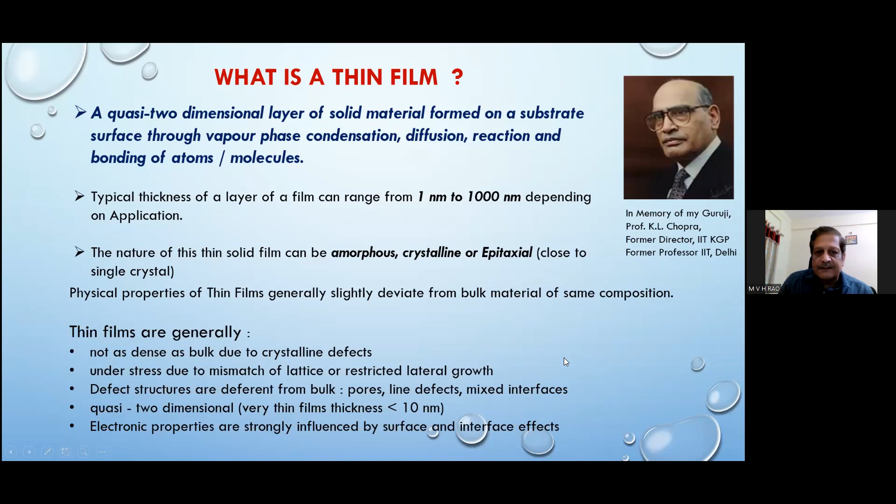Also, the electronic properties strongly depend on the surface and interface effects. One more advantage of a thin film is, right now I discussed a single material, but it need not be a single material. We can always engineer the materials, engineer a thin film structure. You can design a multi-layer combination of different materials in different ways and study the properties, which will be totally different from the individual materials which we are depositing.

So thin film process gives a lot of flexibility in innovatively designing and developing a variety of materials which are otherwise not possible. Now I'll come back to the importance of thin film technology. It is an enabling technology. The present day micro engineering happening in MEMS, or present day nanotechnology, wherever materials are deposited in the form of a film, all this requires it. And it's not just making a film - ultimately you have to study the properties and use it for a device.

It may be a thin film solar cell, a sensor, a gas sensor, or some other electronic device, maybe a laser diode, whatever it is. So ultimately the thin film process is an enabling technology which will realize the photonic device or electronic device. So it is very important - it imparts functionality to this.

Suppose we are just depositing a single layer of some material on a surface. Certain surfaces are corrosive, and you want to stop the corrosion. One of the ways is to put a protective layer on top that will stop the corrosion. Similarly, by depositing hard coatings like titanium nitride, we can protect the sharp cutting edges of tools and reduce the wear and tear of cutting tools using certain hard coating materials.

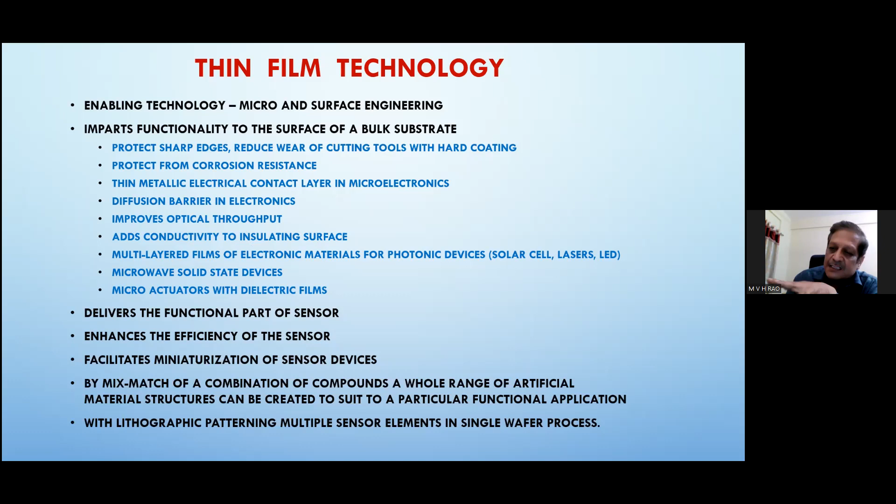Ultimately, after some time, there will be electric discharge. But if there is a conducting layer, it will disperse the charge uniformly over the surface, and that way we can avoid electrostatic discharge. In fact, ITO is applicable to screens also, all the video screens are coated with ITO, and I think most mobile screens are also coated because it is conductive as well as transparent.

There are also other multi-layered electronic materials that can be deposited to generate the latest photonic devices like solar cells, lasers, and LEDs, and even microwave solid-state devices. Thin film technology is used for all the electrical contacts, and also certain dielectric materials are used as microwave devices and micro actuators.

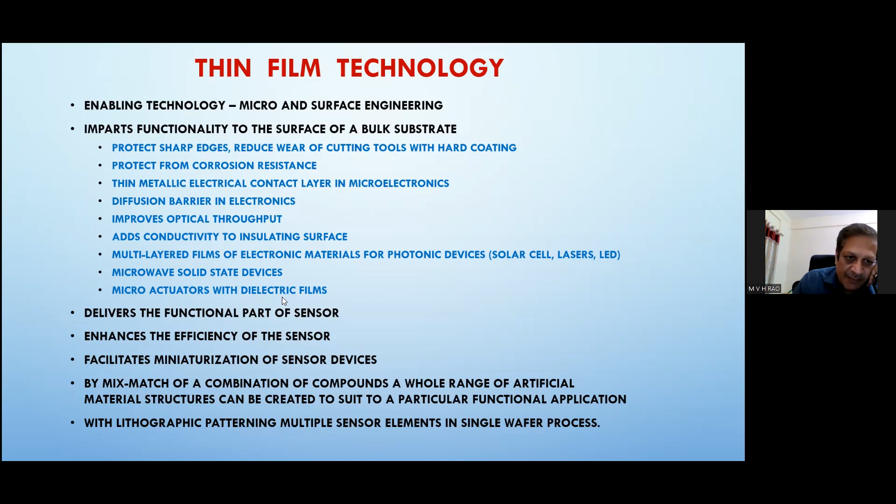Actuator means you apply a certain voltage and it moves - by applying voltage there is movement because of stress variations, and that is why actuation happens. In such applications, using dielectric thin films, microactuators are also there to distort a surface or to correct a surface. That is also one of the applications.

Overall, thin film technology helps by adding a functional part to a sensor - it improves the efficiency of a sensor. It facilitates miniaturization. The whole sensor can be miniaturized to very small sizes, and then multiple sensors can be made on a wafer.

As I told you previously, once you have a thin film material coating system, it is only our imagination what type of film you want to make. We generally follow what is already published and try to repeat or modify those things. But in principle, any combination of metals, insulators, and dielectrics can be used - you can design and make a multi-layer film combination and study the properties, which will have some exciting applications.

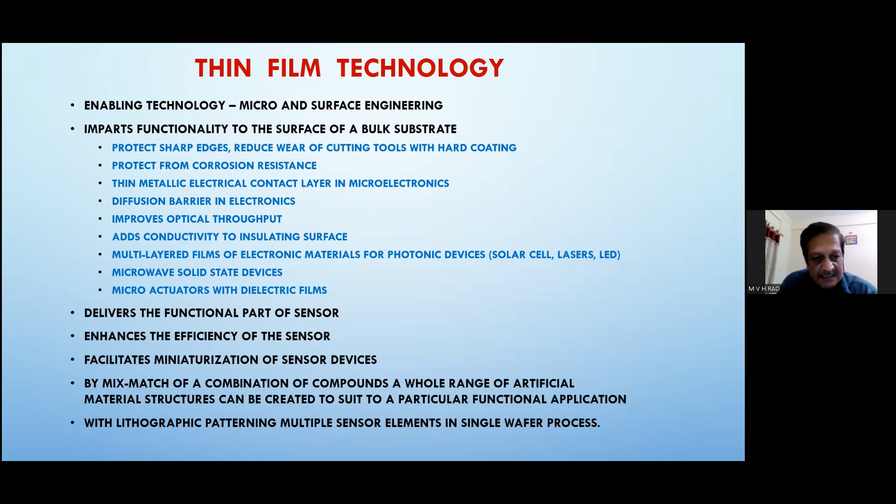So that is it. Now let me move to the next slide - what are the different ways we deposit a thin film?

There are two main categories: one is physical vapor deposition, PVD techniques, and another is chemical vapor deposition. Then there are thin films from a solution, and sol gel, which is also a solution - a semi-solid solution, a gel - and through that process also thin films can be made.

In the case of sol gel, though it is not exactly vapor condensation, the particles are all colloidal - already formed in the sol gel as a colloidal form, with micro and nano particles. They are deposited, and then after annealing, the particles combine together to form the film. Okay, let me come to the first part.

Physical vapor deposition means, as I told earlier, you have to vaporize the material we want to deposit by heating it, either by thermal means or using a high energy electron gun. High melting point materials have to be vaporized with an electron gun, focusing high energy electrons onto the material, heating it until it gets vaporized, and then that vapor gets deposited everywhere.

There are other ways of generating vapor. The method differs in the ways and means of generating vapor, which can get deposited on a substrate, and also in how you impart certain energy to the vapor by ionizing it, using a plasma, or by many other methods. So let us see how to create an ionized plasma vapor of the material. Plasma will help in ionization, which helps in better adhesion and overall film growth.

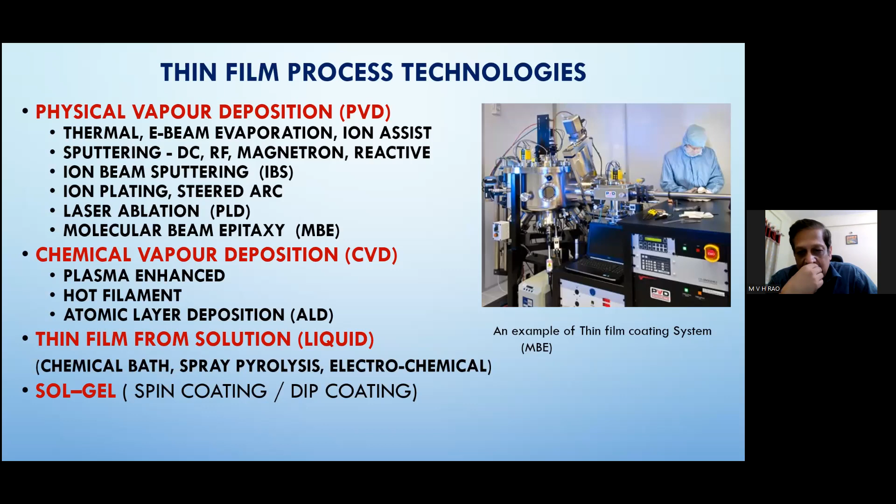Electrochemical deposition is also another standard known method, like gold plating and all - we can plate gold, nickel plating, gold plating. These are all techniques that are used, but there also by appropriate control of the processing, a variety of devices can be made and done.

Okay, I think I have to go a little fast. I'm trying to explain too much.

Anyway, in my presentation I'm not going to go into any of these, only optical things I will be focusing on. So this I can skip.

Vacuum is essential for all PVD coatings, because by generating high vacuum conditions, vapor pressure gets reduced, so you can vaporize the material at a lower temperature. And we have to eliminate atmospheric contaminants.

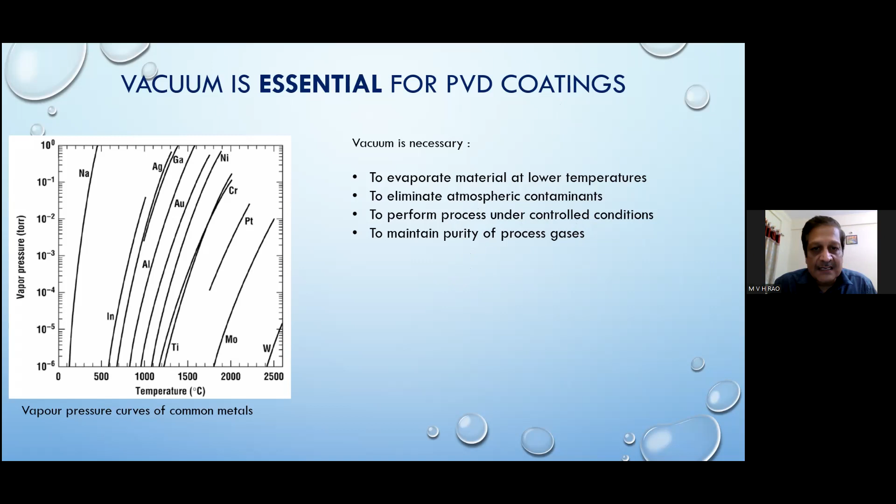So how to generate vacuum? Vacuum technology itself is a big subject. Maybe some other time somebody will explain what vacuum technology is, vacuum chambers, how to generate vacuum, different methods, and how to control it. So I'm giving just a few examples here.

When we evacuate a chamber by pumping out the air inside, this rotary vacuum can bring it down to 10 to the power of -3 millibar, meaning one millionth of atmosphere. But to do the actual vacuum processing, we need to go to 10 to the power of -6 millibar - that is the type of vacuum required. To achieve that, there are different methods.

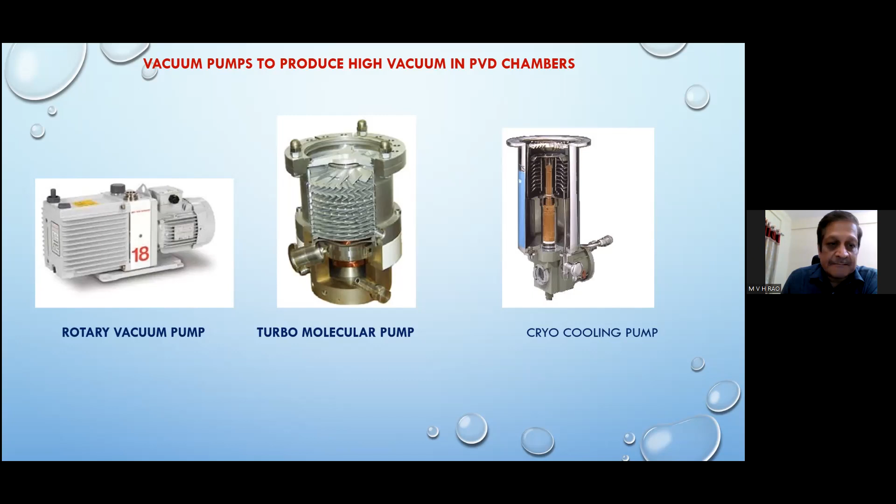So for this reason, normally in any vacuum chamber, the pumping is first done with a roots rotary pump to get a -3 vacuum. Then we switch over to high vacuum, from -3 to -6, using turbo pumps, cryo pumps, and many other varieties. This is a brief introduction about vacuum pumping. Of course, there are also gauges and valves. Vacuum technology is a subject you should know later, so I'll quickly skip it since we have already discussed it.

Basically, there are three types of film growth. When the atoms come and sit on a substrate, there is island growth, meaning small islands are formed, and slowly these islands grow bigger and coalesce together to form a film. That is one way. Another is layer by layer growth.

This layer by layer growth is called the Frank van der Merwe method of procedure, as in ALD and MBE techniques. First one layer forms, and only after that layer is fully complete does the next layer start forming.

In other cases, it's a combination: the first layer will form, and after a few layers, islands will start forming again. This is a combination of layer plus island growth, called Stranski-Krastanov type of growth. These are the three typical thin film growth modes, describing how atoms come together and coalesce to form a film.

Depending on our type of application, we need to worry about what growth conditions are required to achieve the desired result, and what process parameters we have to control. So that is what is important here.

So first, atoms will condense, then adsorb, and then run around on the substrate. If the substrate is imparting some heat energy, they will have freedom to move around. Normally, if there are certain defects, the atoms get stuck at those defects.

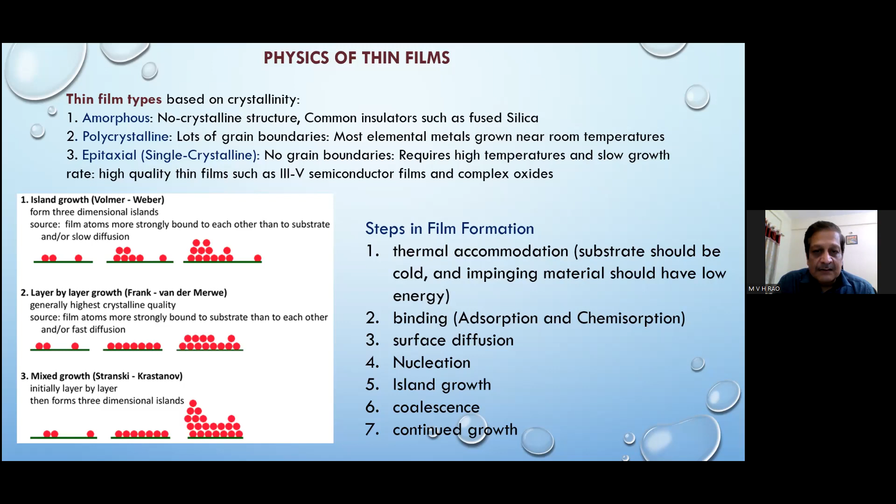So, atomic layer engineering: when these atoms come together, first one, two, three, four atoms, as they combine there is a combination of free energy, some thermodynamics, involving the surface energy of the nucleus and the volume energy.

Only when the volume energy is more than the surface energy will it become a stable entity. Otherwise, there is a critical radius for this nucleus, and until that radius is formed, it will not be stable.

This means if 4-5 atoms come together and the surface energy is more, they will break up again and return to being individual atoms. But if the volume energy is sufficient, say 10 atoms come together in one shot, then the overall volume energy is better, and it will be a stable material.

If we deposit very fast at low temperatures, we'll end up with a very columnar, loose type of grain growth, which will not be stable and will not adhere properly. Ultimately, whenever we are depositing a film, what we want is strong adhesion.

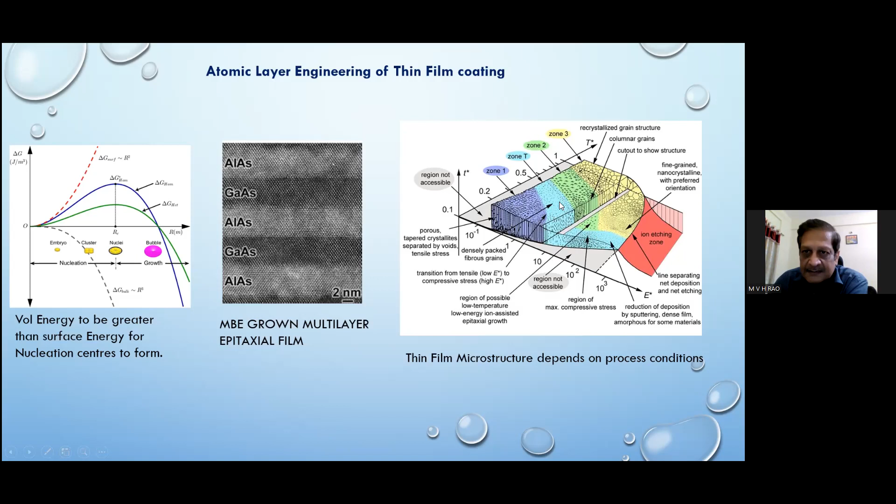It may be a single crystal, suppose we want. In that case, we need to use low deposition rates and appropriate high substrate temperatures, so that appropriate energy is imparted to the atoms to move around. If the temperature is too high, that's also a problem, then it will re-vaporize. So this diagram tells us what are the typical conditions required to obtain either a crystalline film, amorphous film, or an intermediate microcrystalline film. You can study this later when you take thin films as a subject.

Okay, there are different methods. We had already discussed most of these things: thermal evaporation and sputtering techniques.

In the case of thermal evaporation, as I mentioned, here I'm showing an electron beam. It comes bending in the form of an arc, achieved by using a magnetic field. There will be a high power magnet, and we know that charged particles bend when there is a magnetic field. So using that field, the charged electrons that are thermionically generated by heating a tungsten filament are accelerated using high voltage. Those high voltage accelerated electrons bend through the magnetic field in the form of an arc, and they get focused onto the material we want to deposit, in a crucible. In that crucible, a high melting point material is put, and when this high energy beam is focused on it, energy is imparted and it will melt and then vaporize further, and the vapor atoms come up to the top.

This is a general typical substrate arrangement, called planetary motion. There is one big holder which will be rotating, and to that, smaller holders are put, which will also be rotating in the opposite direction. This is all required to ensure uniformity of the film on the substrate. Otherwise, a simple one stable substrate also will do the job.

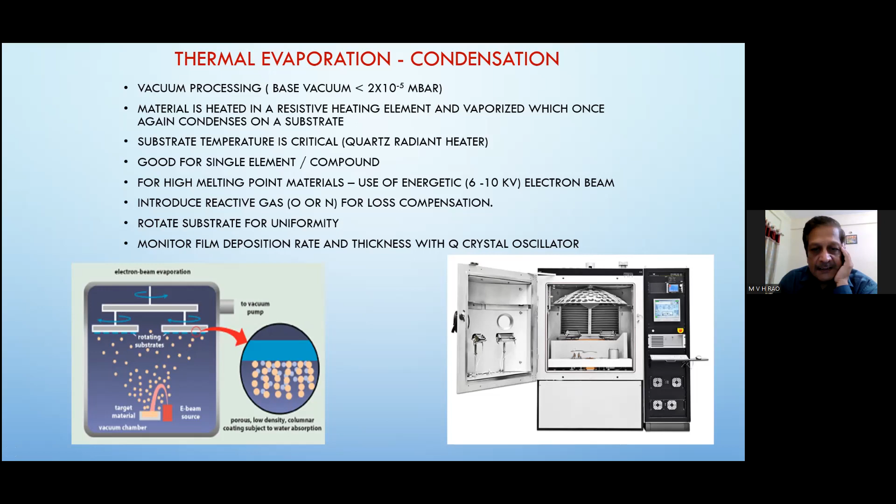Here I am showing certain sources. For thermal evaporation, we use molybdenum evaporation boats. On the other side, I'm showing this electron beam deposition system. Here we see the beam hearth, where the material is put. Then you can see the power supply, where high voltage is coming through these two leads. There is a tungsten filament here, which is heated, as well as the electrons are accelerated. There is also a hidden magnetic field, which is not shown here, it is covered. That magnetic field bends the beam and heats the material.

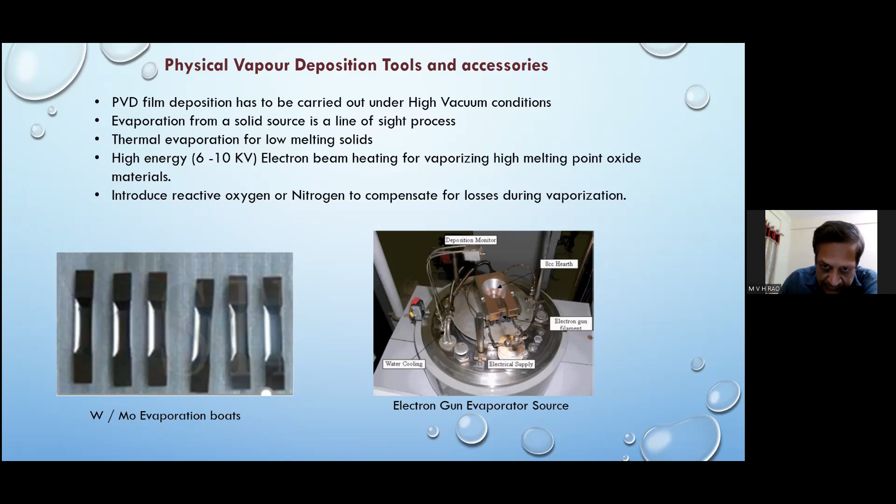Now, this is also ion assist deposition. I'll quickly go through it. It's basically the same as electron beam deposition. The only thing is, to improve the process, we can impart extra energy by putting an ion source. The purpose of the ion assist gun is, as shown in the earlier growth modes, suppose island growth is happening. If there is no ion gun, it will simply grow as island growth, and have a very rough surface, with a lot of porosity. It will not be good.

So to convert the island growth process into a layer process, what we can do is use the ion source to give some extra energy. The growth islands are intentionally broken away, so that the atoms vaporize again and rearrange themselves properly to form a layer.

So the ion assist gun basically re-etches the growing film. It is etched partially by this ion gun so that all the high point islands are removed and it becomes smooth. Then the atoms are once again rearranged, given certain energy to rearrange themselves, so that the film grows in a much smoother way.

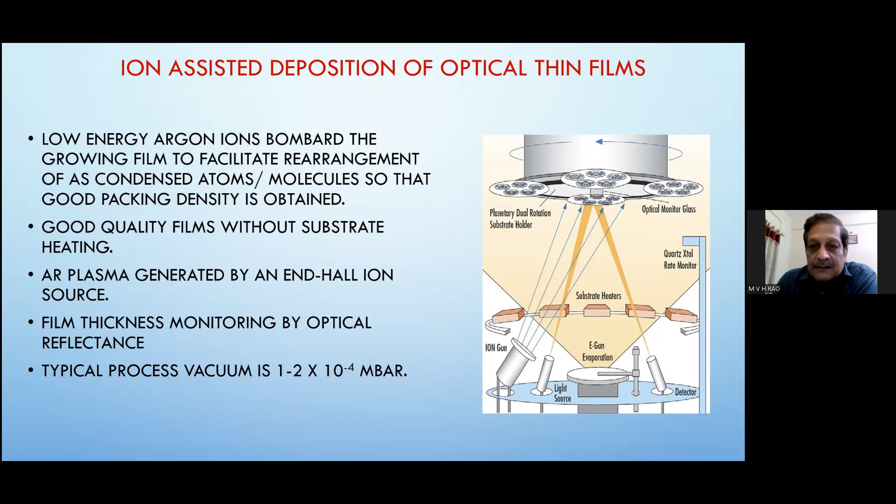And sputter deposition, I already told how it happens. There is magnetron sputtering here, where magnets help the ionization of both the target atoms and the argon ions to improve the sputtering yield. For that reason, magnetrons are put in place.

Typically the distance between the substrate and the sputtering target, in the case of sputtering systems, is maximum about 50 millimeters, 5 to 10 centimeters. That is the maximum gap, because sputtering happens very slowly with a very low yield, so we cannot keep the substrate too far away.

Whereas in the case of electron beam gun and ion assist, the distance is almost more than 30, 40 centimeters, sometimes 50 centimeters also. The distance between the source and the substrate is much higher.

But those are all line of sight, because the atom released by the source has to travel in straight lines unless it is knocked by some other vacuum molecule or atmospheric molecule. Otherwise, it will move straight up and get deposited, hitting the substrate. That's just what is called line of sight.

Okay, you tell me whenever the time is there. I'm just okay.

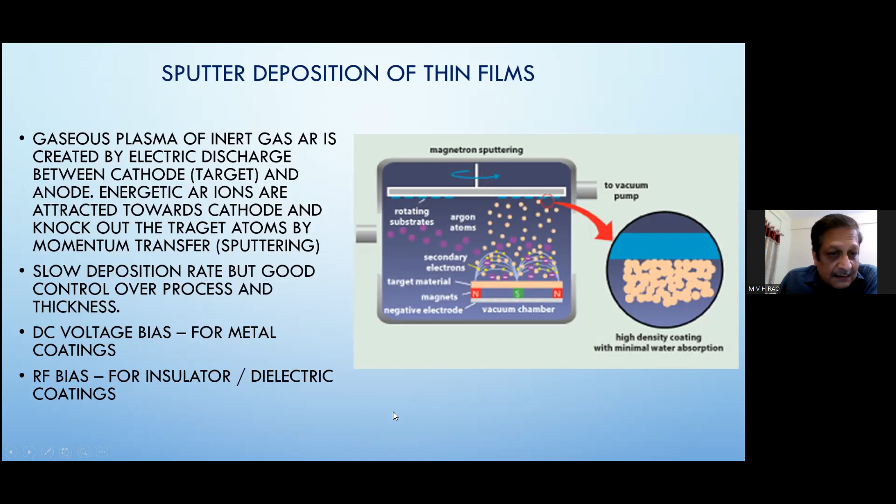So these are the different methods. I just want to quickly go through them. I already told about pulse laser deposition.

The laser plume is generated by a laser beam, and it vaporizes locally, maybe within a few millimeters, 2mm or 3mm or maximum 5mm area attacked by the laser, whatever is the spot size. From that area only, material is evaporated and it comes in the form of a plume and gets deposited.

For that reason, you need to continuously keep rotating or moving the target, so that every time some fresh surface comes into picture. Otherwise, it will simply drill a hole. I already talked about how plasma can improve the coating, how it can impart energy to the atoms so that they can form a better film.

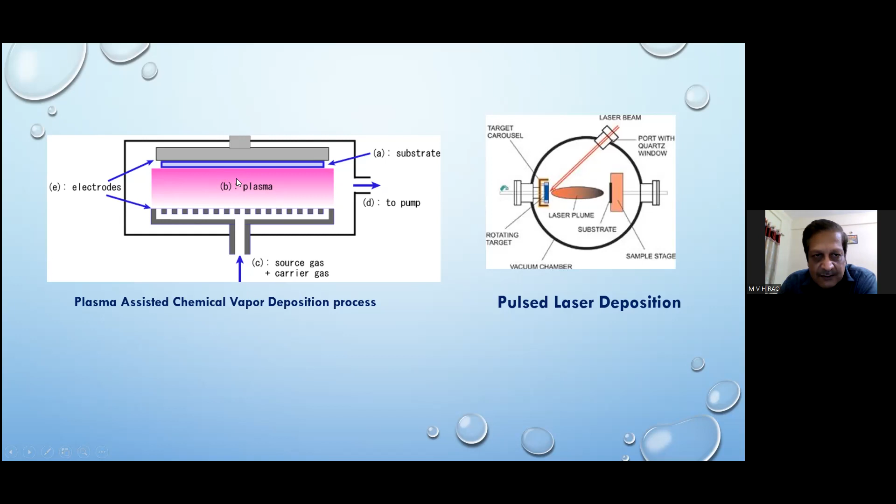In the case of ion beam sputtering, this also I already explained. There is a target and an ion source, particularly mostly argon is used. High energy argons are ionized inside a chamber. Plasma is created inside the ion source and then accelerated through a grid, coming out with about 500 to 1000 electron volts energy. Those energetic argon ions hit the target and knock off the atoms.

These atoms come out in the form of molecules and atoms, as vapor, and get deposited. In this case, this itself gives a very good film as it is, as good as ion assist. But to further improve the process, sometimes another ion source is used to assist, to get very smooth films with very low micro roughness, so that the interface is very well defined.

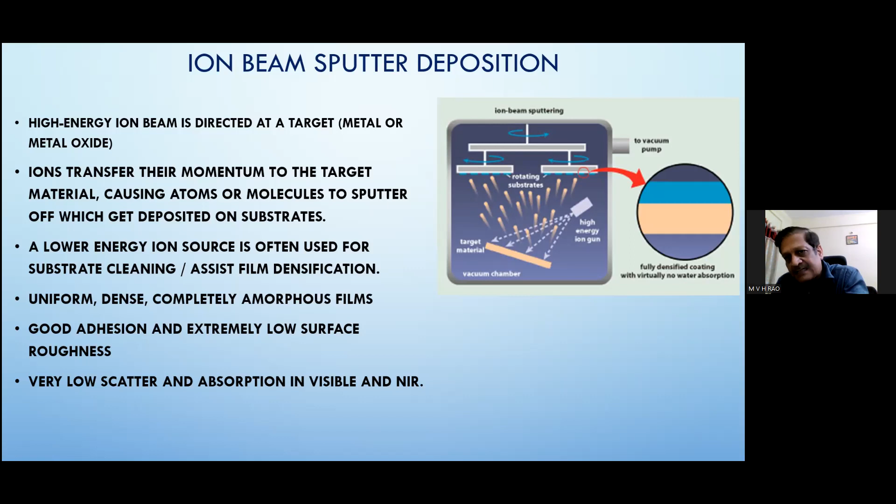But generally, only in special applications do you require one more assist gun. Then two ion sources will be there, one for etching the target and removing the material, and one for this assist purpose.

Now I come to the general thin film, to the optical coatings. The process methods are the same, for good adhesion to the substrate. These are all the requirements: it should be abrasion resistant, producible with reproducible film properties, and environmentally stable. All these things are required for any multi-layer, since optical coatings are multi-layer films.

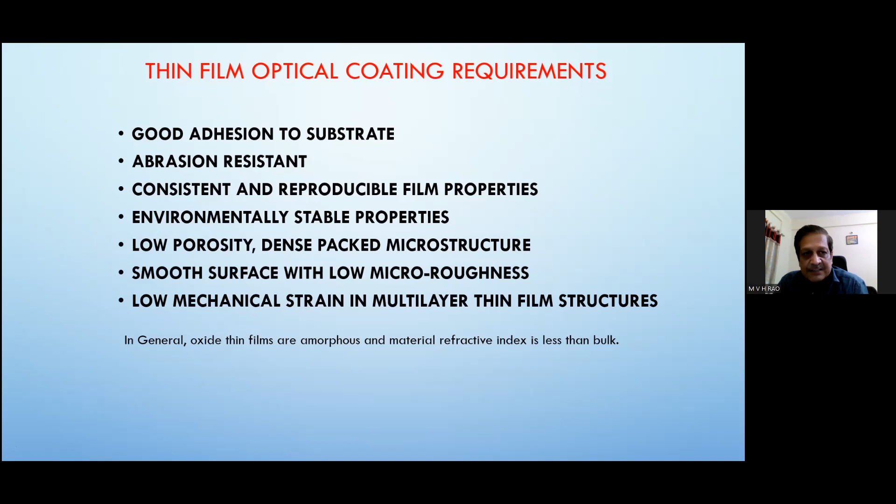This is something I already mentioned, so I'll quickly go through it. Surface cleanliness is very important. Lattice matching is important if you want single crystals. Substrate temperature is also a very important parameter for good adhesion and good microstructure. The deposition rate means how many atoms are arriving and getting deposited on the substrate.

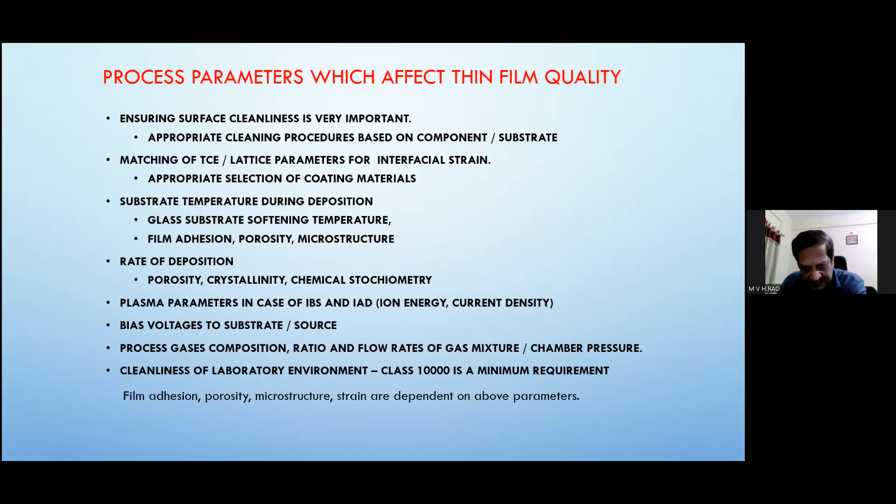If it is a very fast deposition, it will be highly porous. Chemical stoichiometry, we already mentioned all that. In the case of ion beam assistance, ion assist, the ion beam parameters dictate how the film is grown. So these are the various aspects, and all of them are already covered.

I already mentioned substrate cleanliness is very important. That is normally done by etching and cleaning with soap solution, and then chemically etching if required to have a good surface preparation. Sometimes in situ is possible. In situ means after loading the substrate inside the chamber and getting the vacuum, you create a glow discharge plasma. These argon ions hit the surface, but without coating, it will simply knock the surface uniformly, so that any contamination on the surface is removed.

This is something similar to the assist gun, the ion assist, ion source. The same thing without depositing the film - if you are simply doing ion assist, simply cleaning the substrate - that is one way of preparing the substrate ready for coating.

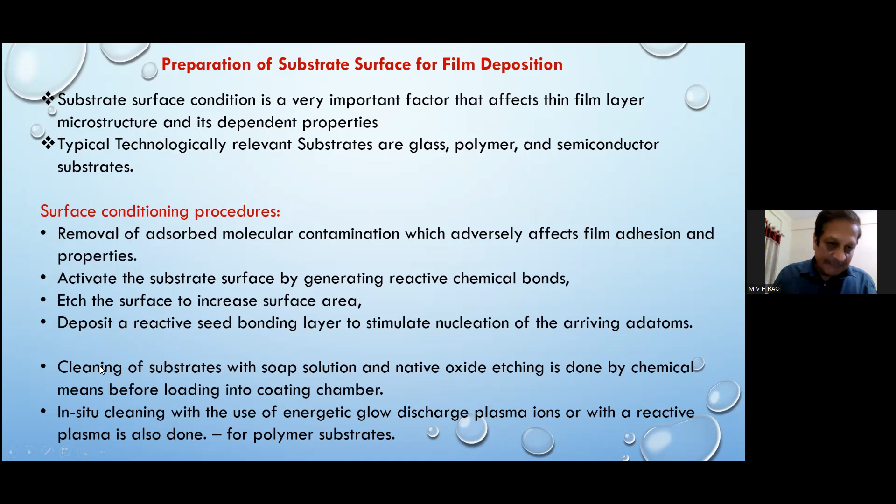So these are the methods. Now we'll come to the thin films topic. There are a variety of optical films made: high reflectance coatings on mirrors, and dielectric mirrors for lasers, for different types like 1064, 1532 nanometers. Anti-reflection coatings on lens elements, as I already told, all camera lenses should have an anti-reflection coating.

Whether it is an IR imaging camera, night vision camera, in that case also we require anti-reflection coating, generally on germanium and zinc selenide materials used for these camera lenses. So these lenses after fabrication need anti-reflection coatings. And in the case of NUV, we can use fused silica or sapphire.

And these are the different chambers that we use. This is a very large area coating chamber. This is medium size. This is small size. These are all there in our LEOS lab at ISRO.

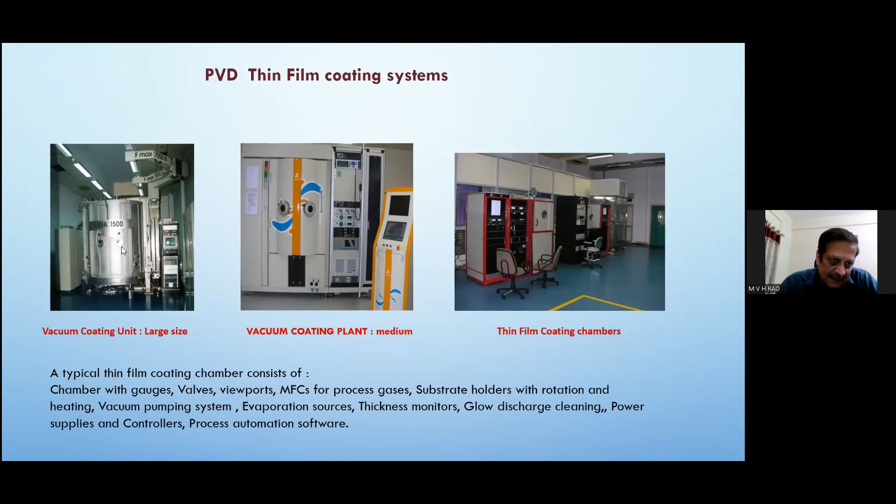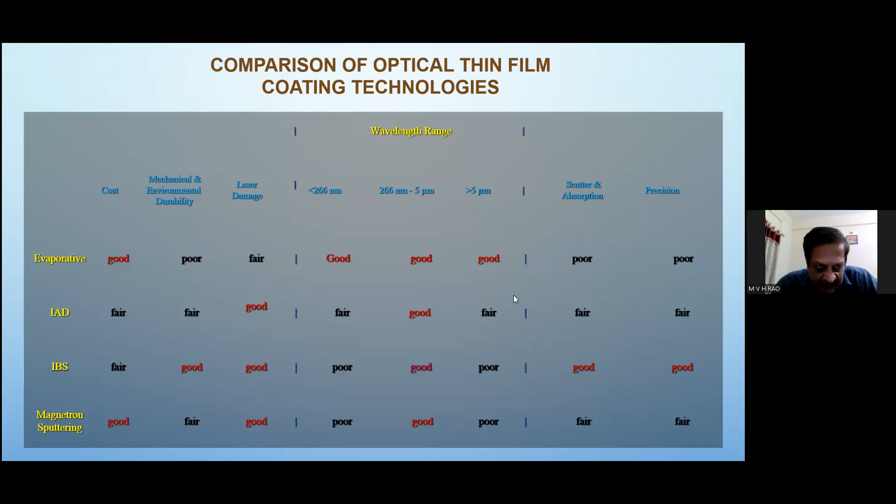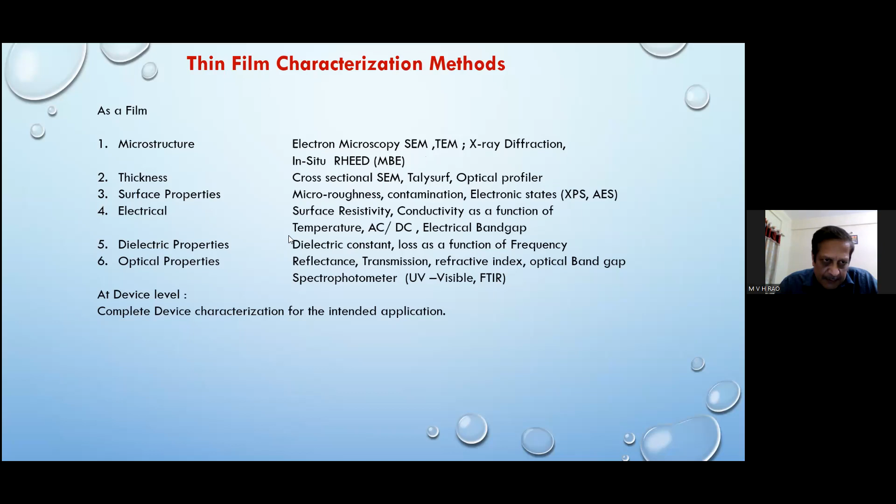So we have to characterize using microstructure calculation, electron microscopy, XRD, and other different methods. And all the optical, dielectric, electric properties have to be characterized depending on the application.

So this I have already covered. Generally, typically the reflective coatings are done with aluminum, silver, gold, and chromium - these are the materials used for reflective coatings. Dielectric coatings use silicon dioxide as a low index material. Titanium oxide is a high index material. Tantalum oxide is also a high index material.

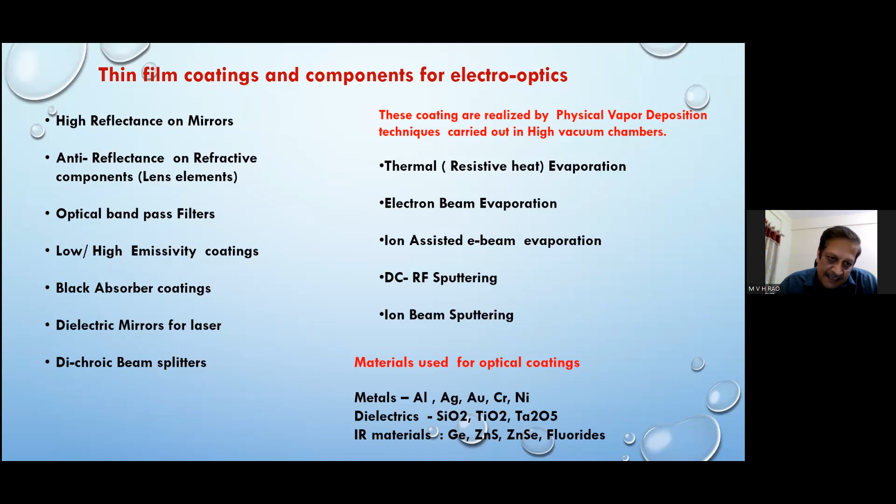Generally, most of these filters are done with multi-layer high and low refractive index coatings, and by appropriate optical design of the coatings, they are realized. There are several aspects to it, but I don't want to go through all of this.

In the case of optical coating, what you need to understand is these two things only: quarter wave optical thickness and half wave optical thickness. For a particular wavelength, the optical thickness is the combination of the refractive index of the material and the physical thickness - that multiplication factor. Whenever that is a quarter of the wavelength, it's called quarter wave optical thickness. When it is half the wavelength, it's called half wave optical thickness.

Whenever there is a quarter wave optical thickness, the phase difference is 90 degrees, so there will be destructive interference. When it is half wave optical thickness, the phase difference between the two rays - one reflected from the top layer, another from the next layer - causes interference between those two waves. If the phase difference is pi or 2 pi, it will be constructive. If it is pi by 2, it will be destructive. So basically, these optical interference techniques are used to design the films.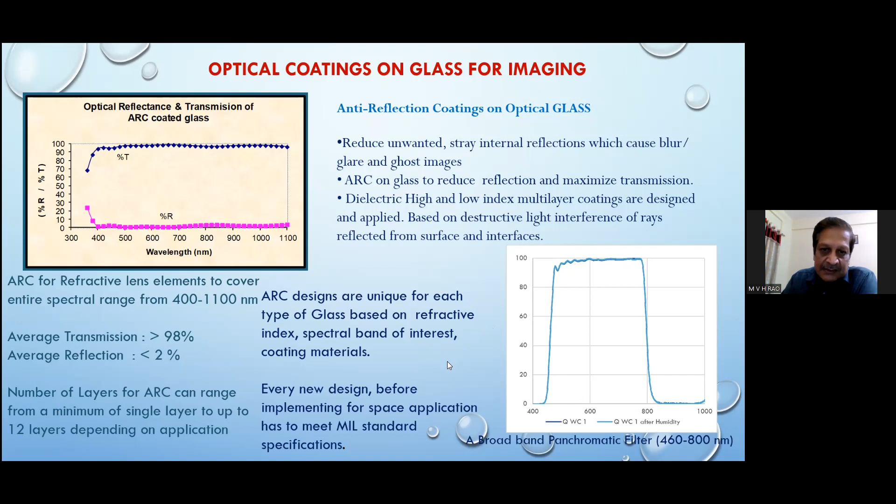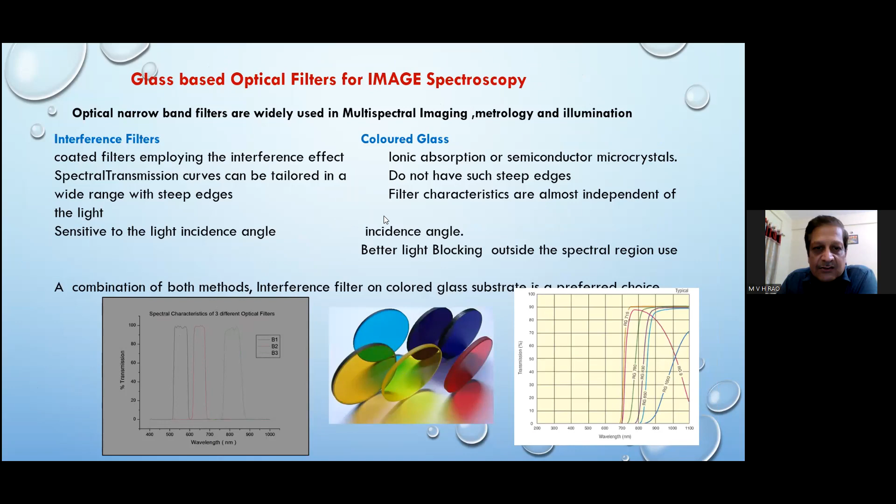And these are other filters. Filters means for any particular wavelength, center wavelength, we need a very steep cutoff on both sides. So these are all done with optical design software, which are available nowadays. Once these are achieved, this is the higher end of optical coating technology. I don't want to get into it right now.

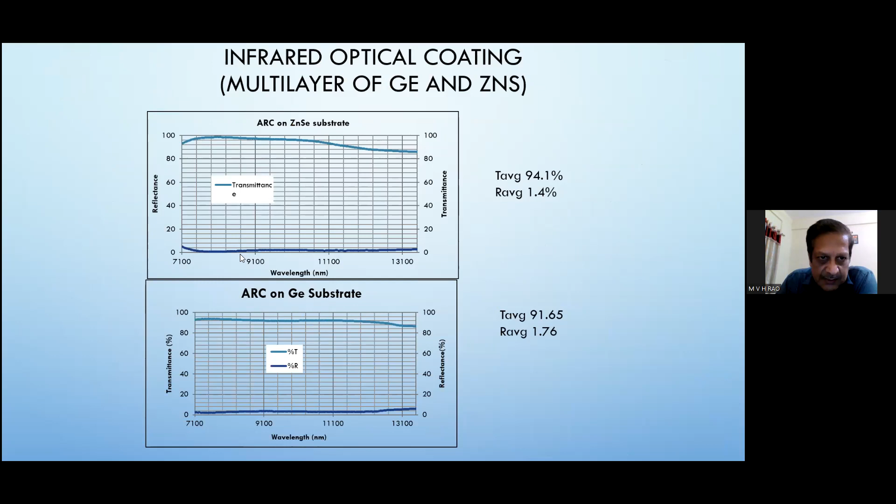As you see, when I read out these things, most of these are not available in the country. We have to import all these things. I think it's high time we need good power supplies, stable coating materials, and stable targets. Of course, on the vacuum part, we are very good, but we are importing the pumps and everything. Only the mechanical fabrication part we have mastered; to that extent we are doing well.

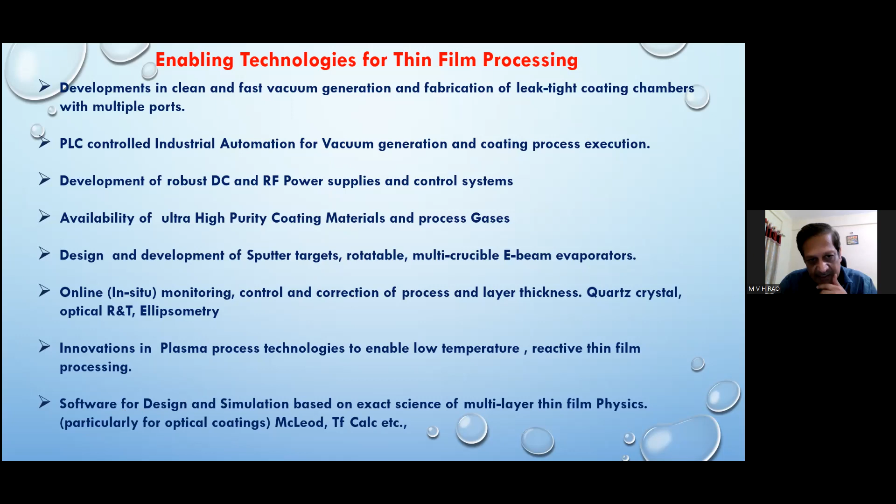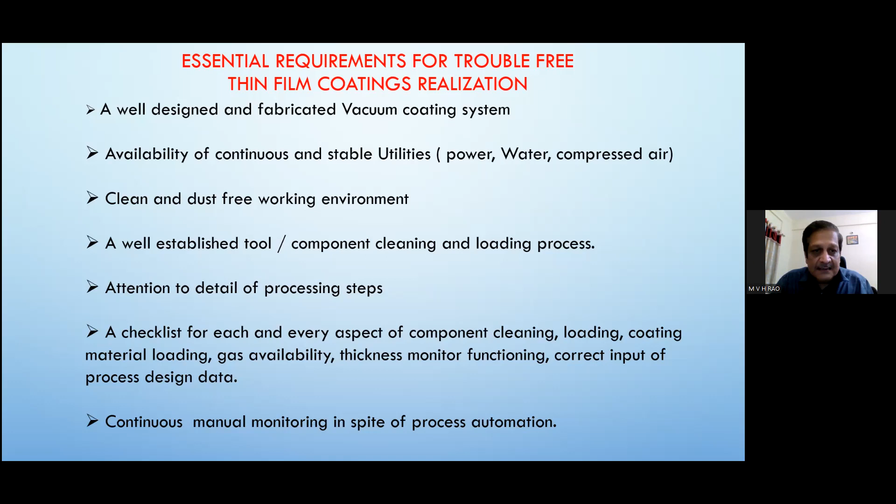But it's still a long way to go to have indigenous coating chambers made within the country. Some efforts are going on, but let us see how it works. Thin film coatings is not an easy process, as I explained. Everything has to be very well controlled and happen as per the plan, as per a design. Only then will we get the ultimate result. So it is a very tough process overall.

In summary, thin film processing materials is an enabling technology to develop advanced sensors, electronics, optics, and optical instruments. Thin film technology over the years has evolved from a very black art, meaning we simply deposit without knowing what we are getting. That was the situation some 50, 60 years back.

But now it is a highly sophisticated deterministic production process because of improvements in vacuum technology, improvements in computer-based automation of processes, in-situ characterization methods like thickness monitoring and optical monitoring, and the availability of high purity chemicals. Because of all these conditions, the process has become a highly reliable process.

So further technology development is possible, and it will happen. Now everybody is talking about artificial intelligence and machine learning processes. Now that we physically understand the whole physics and chemistry of what is happening inside the chamber, under what conditions, what type of film we'll get, everything is very well understood. All that knowledge has to be put in a computer as AI and machine learning, and then you simply load the material, load the substrate, apply these methods, and run the program.

We should get what we want, the results should come out quickly without much effort. That type of thing, over a period, I think the technology will come. With microprocessing IC technologies coming within the country, photonic systems and devices are also developing, solar cells have a big impetus, and we need to develop semiconductor policies there. So the future is very bright within the country itself, no need to go outside.